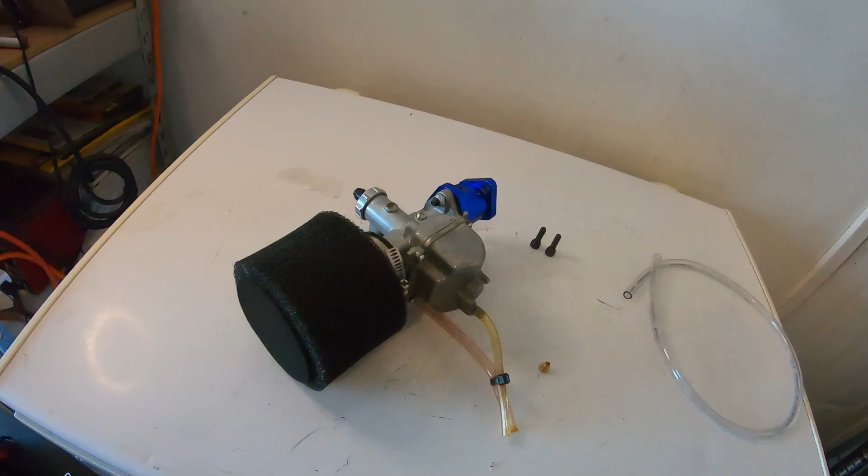In the quest for more top speed, I think I'm going to swap out the stock carb, even though I rejetted it, for this VM22 Mikuni. Before I throw it on there, I'm going to put a 115 jet in it, because I think it's got too big of a jet in it right now. We'll see if it gains any performance by throwing a Mikuni on it.

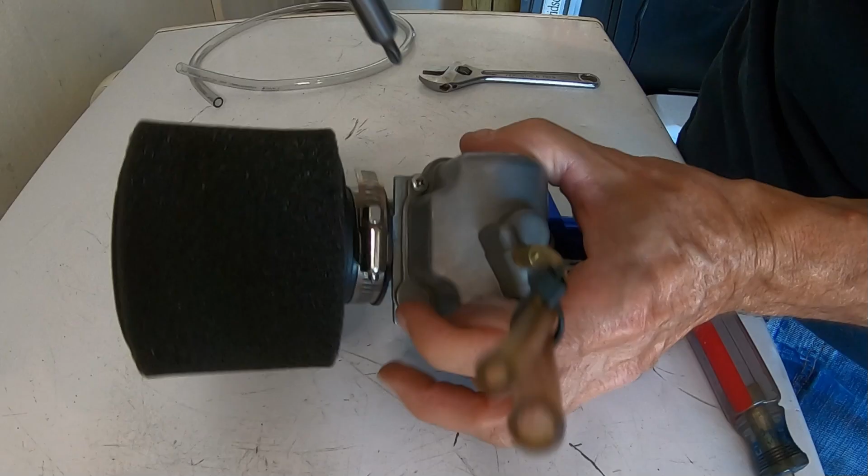Let me yank this bowl off here real quick and we'll throw another jet in it. Probably a 115. I think it might have like a 130 in it right now, or 125. I think that might be just a little bit too big.

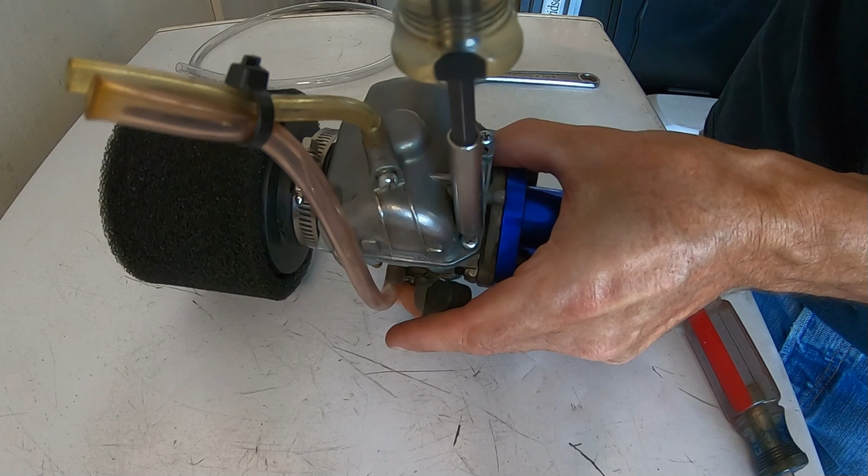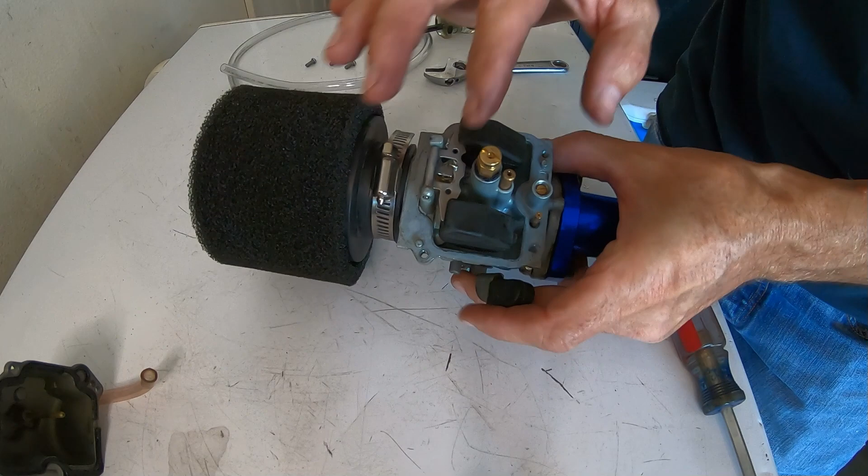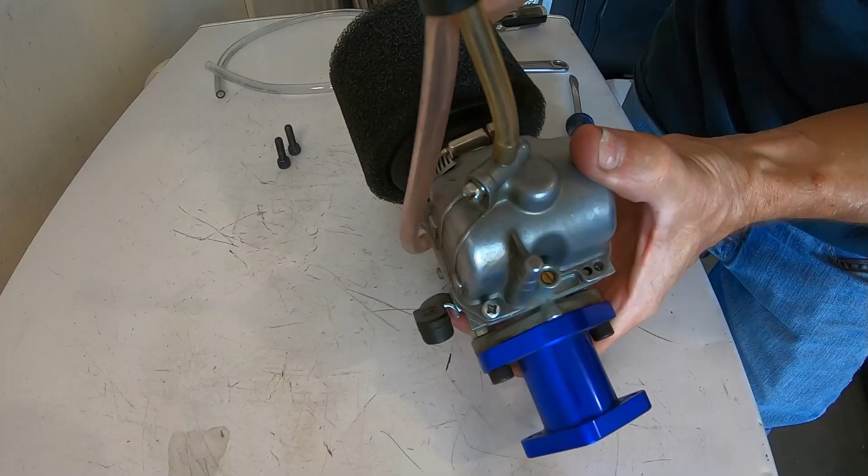There we go, 115. So there we go, 115 jet. I'll go ahead and put it on there with a 115 and we'll start out with that.

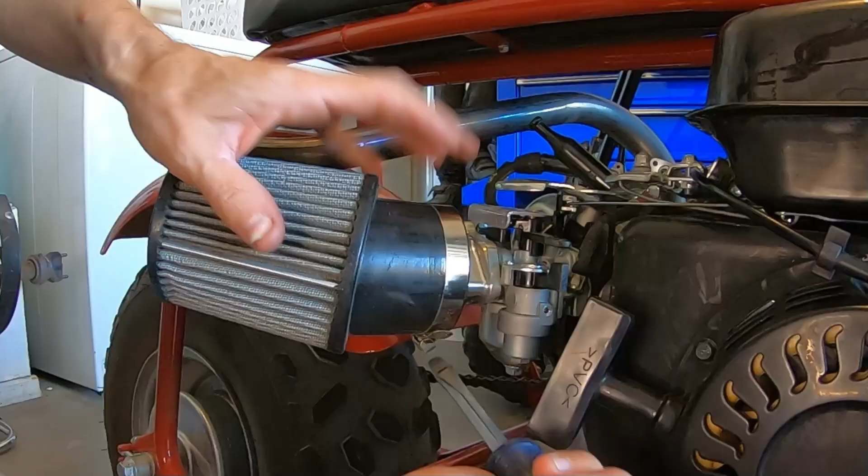Go ahead and pull off this air filter. I think I can still use this air filter on the Mikuni with an adapter, if I want to. Go ahead and pull off this adapter.

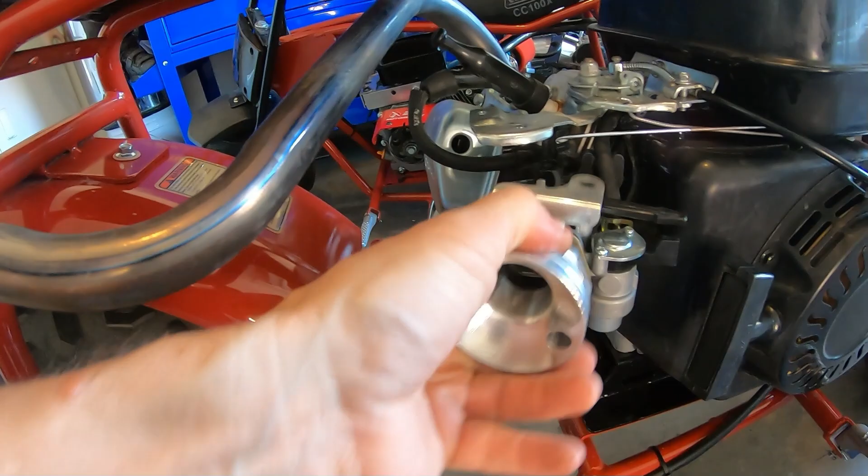Might as well go ahead and unhook all this linkage, since I'm not going to be using it anymore. I'm going to have to solder a tip on this cable.

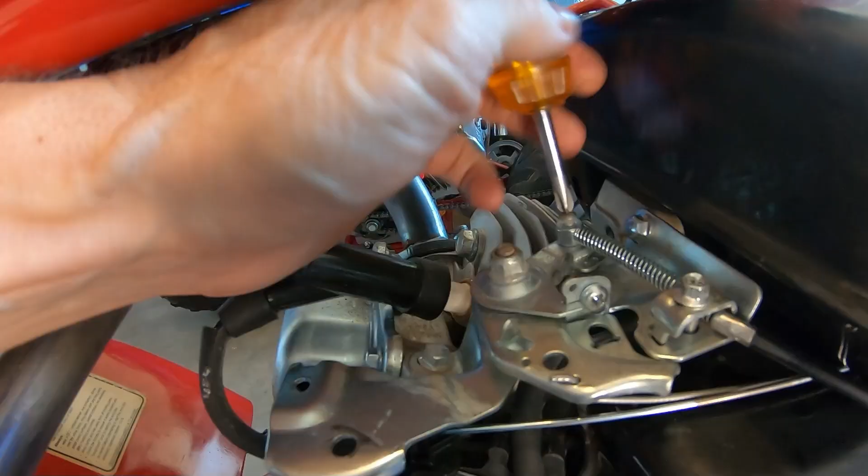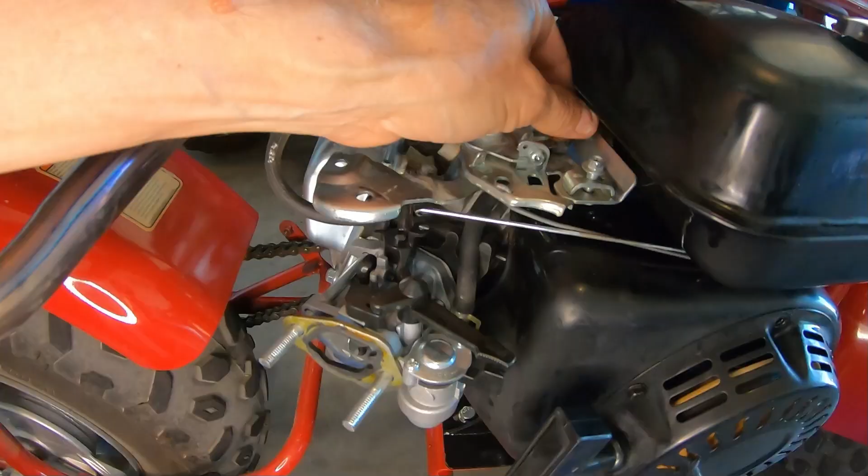There's that. What's nice about the Mikuni is you get rid of all this linkage, makes it look a lot cleaner. I think the Mikunis are really easy to tune too. That's another thing I like about them.

Alright, so there's that. Let's go ahead and pop off this linkage. Looks nice without it on there. Go ahead and pop off this linkage. I'm going to go ahead and pull this fuel line off.

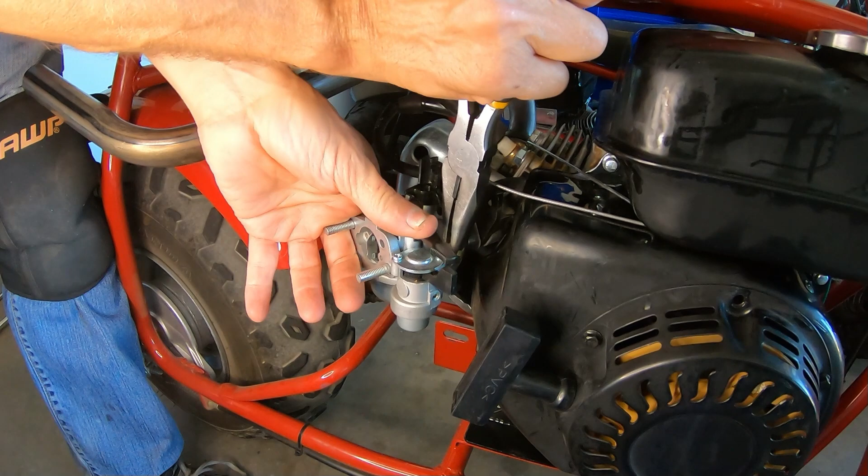Go ahead and yank this carb off. Well, if this carb doesn't gain any performance, at least it'll look cool on here. That's all that really counts, as long as it looks good.

There's that. Now I can pull this linkage off this governor arm, which it doesn't need anymore. Later on I can just pull this whole arm off, because it doesn't need it. Later on I'll go ahead and pull this whole governor arm off when I pull the tank off. So I'm going to go ahead and put this carb on here.

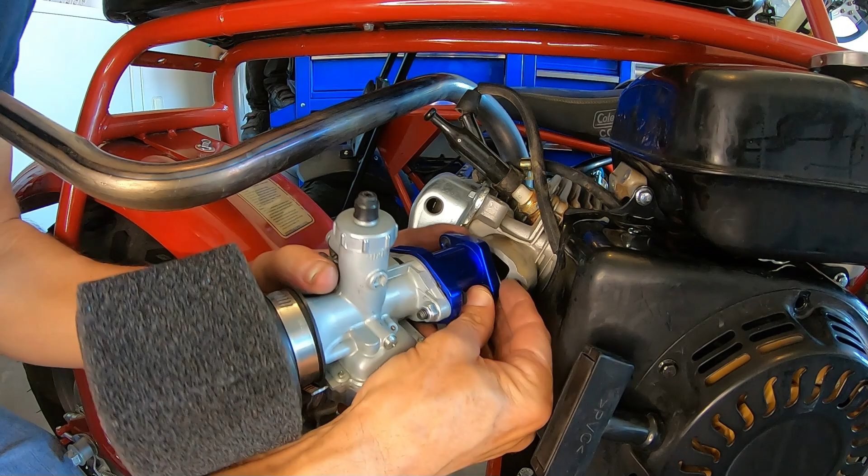Go ahead and bolt the carb up. So there's that. Yes, it looks a lot cleaner on there than all that linkage and stuff.

Go ahead and install this fuel line, and I'll put an inline filter on here so the line will be long enough, and at the same time you get a filter too.

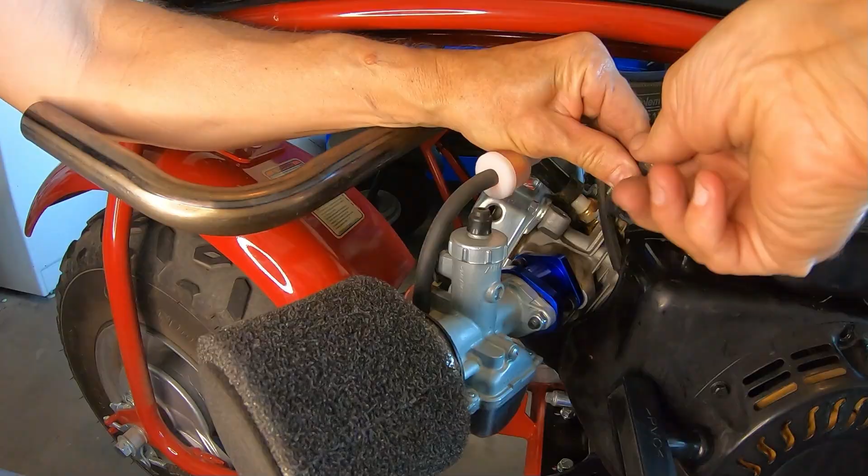Alright, so I'm going to solder it onto this cable. With the cap on here, it's probably about 2 1/4 inches of cable you need on the Mikuni sticking out. Let me go ahead and put this cap on here. So about right there.

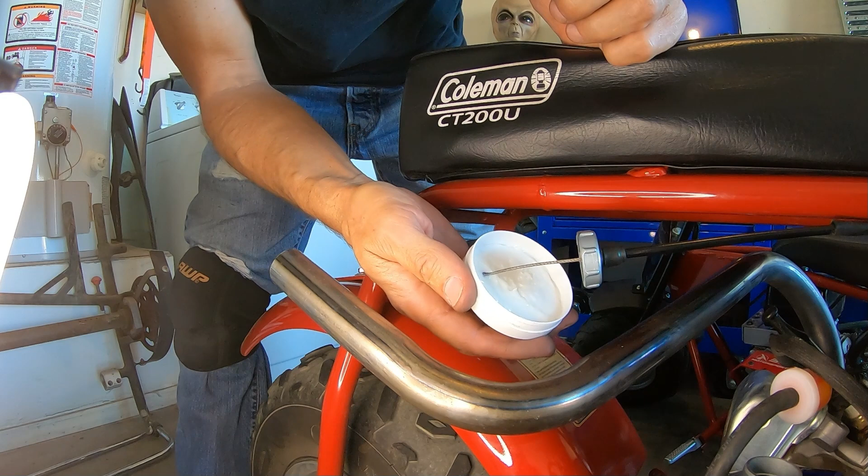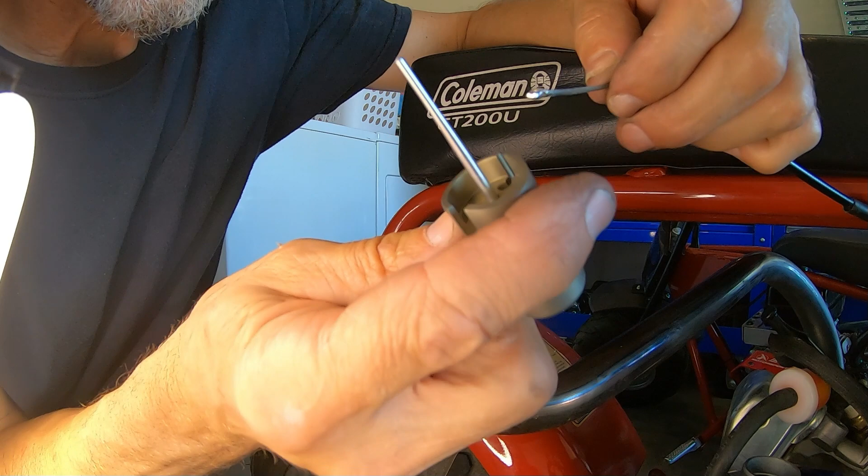Flux on it. So there's that. Let me get some heat on this thing. Let me see if that's enough to hold itself in the slide. Alright, yep. Alright, it looks like it'll do it. Sweet.

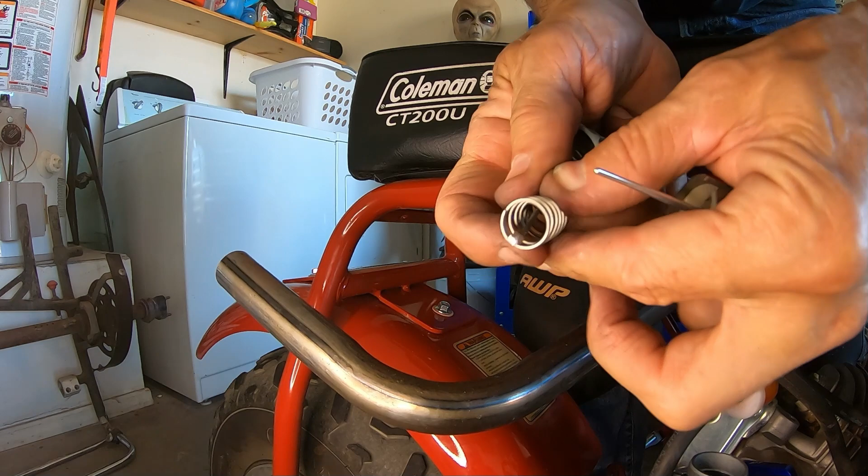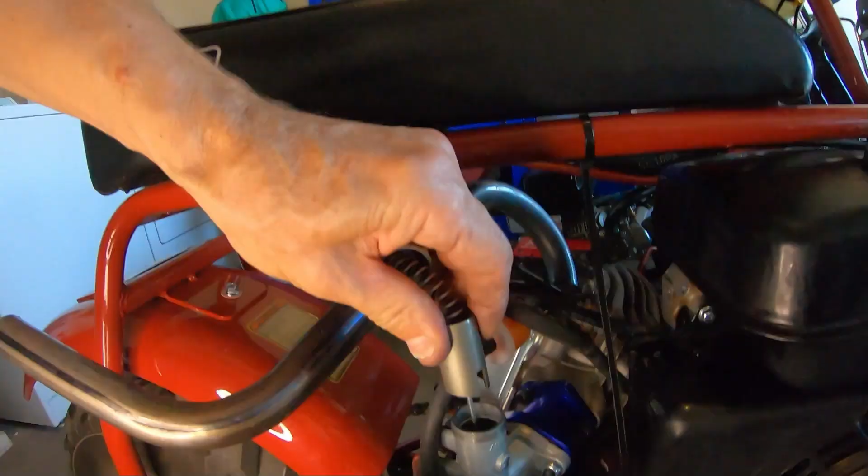Alright, so let me go ahead and put the slide on here. Alright, should do it. Go ahead and pop her down in here. Hopefully.

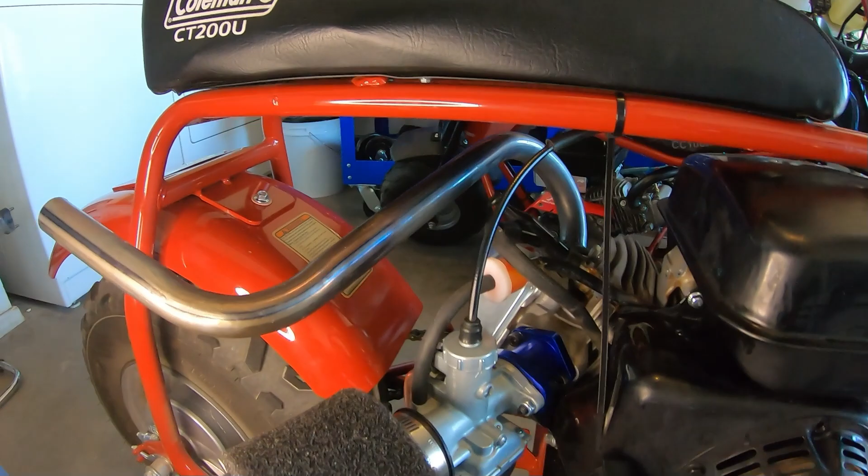Ready? Sounds like it's working. Let me pull the air filter off and look at the slide. Let's see down here. Yep, alright, perfect.

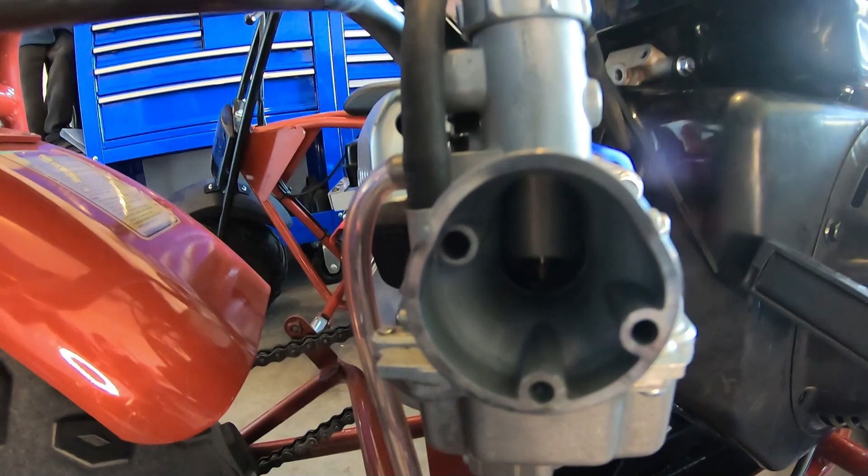Perfect. Got full throttle. So I have this adapter, so I don't have to use this filter. I can actually use the bigger K&N style filter.

Alright, so we're going to put this adapter on here. Got the adapter on there. So now I can use the big air filter on the Mikuni, the same air filter I had on it before with the stock carb.

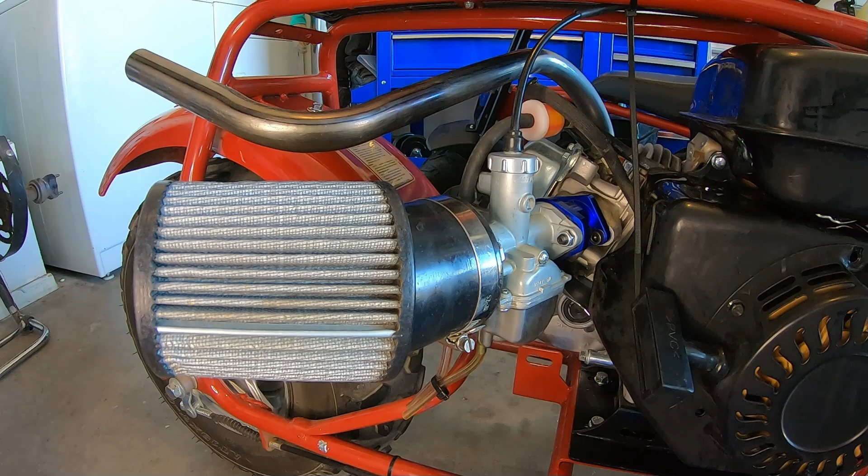Alright, looks like we pretty much got it. Let's go test her out for a 0 to 30 and top speed. I'm interested to see if it'll gain top speed. I'm not sure about 0 to 30, but I'm pretty sure it'll gain top speed. Let's see what we got.

Well, I guess that's a good sign when it starts on the second pull. That's pretty good. Alright, let's go test it out, 0 to 30 top speed.

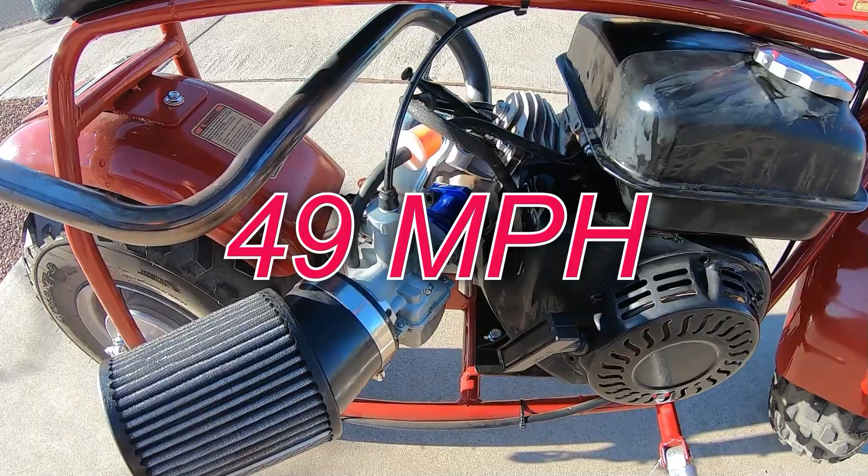So with the VM22, we got 49 miles per hour, the fastest speed so far. We dropped just a speck from 0 to 30, but pretty close. So maybe one more mod and we can get 50, or maybe just mess with the jetting or something. Maybe a flywheel key. I'm pretty sure we can get 50.

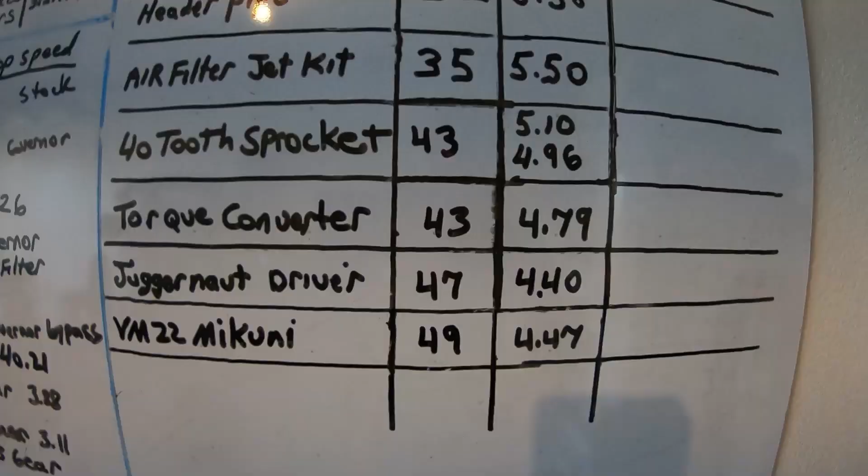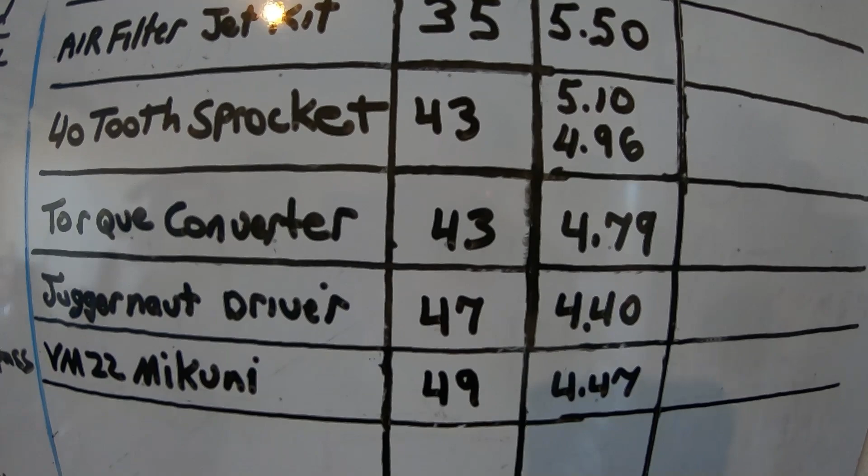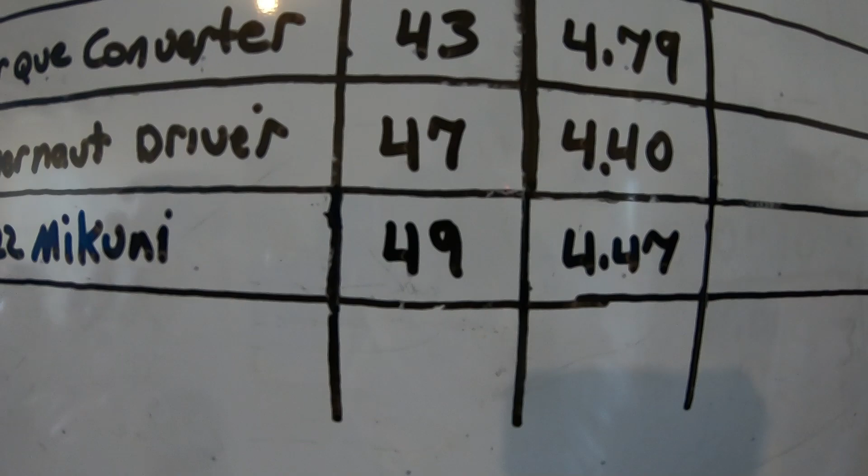To reach 50, I don't want to put any more gear on it because I want to keep the 0 to 30 times down where they are, so it still has some climbing power. So I'll have to either mess with the jetting or maybe add some timing. But still not bad for a stock internal 196. It still has quite a bit of pull. It actually has a lot more pull than it did from the factory, from 0 to 30. Even with the small gear, it's in the 4-second range, but it'll almost do 50. So it's kind of the best of both worlds, quickness and fast.